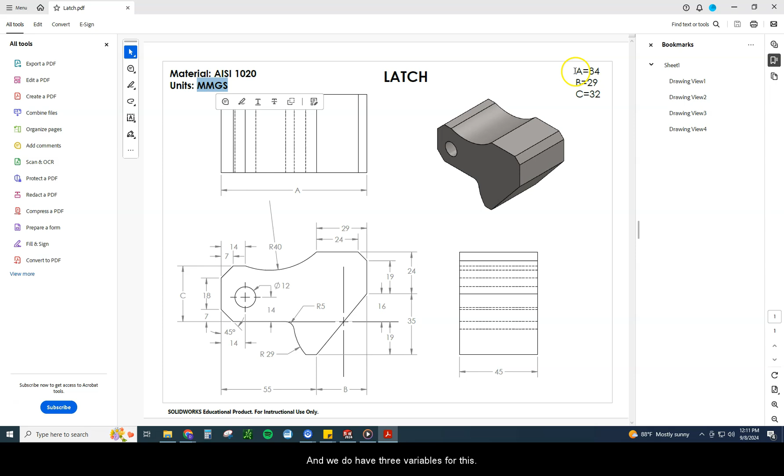We have A, which is 84. That's going to be our total length of our object. We have B, that's the distance from left to right of where this diagonal line is located. And then we have C, which is the height of this back part right here. Okay, so we're going to dive into this. Before we do, I kind of want to point a couple things out.

Number one, this distance right here, you're not going to see a length on this distance because it is based upon the center of this arc right here. This arc, if you draw it with this center point, it's actually one great big circle, and that's the center point for it. And you can see that center point is collinear with this horizontal line right here. So as it comes across, that's where it's going to cut through.

We can see our overall length, like I said, is 84, so you have to take that into mind whenever you're trying to locate this center point. You have a fillet right here of 5, and you do have another arc right here with a radius of 40. You have a couple of 45-degree angles on here, and one of the things that I try to teach during this section is bringing in some actual geometry.

Okay, so the Pythagorean theorem says that in any right triangle, a² + b² = c². C squared is the hypotenuse. So the squares of the two sides will always add up to the square of the hypotenuse. What that means in geometry when you're drawing is if I have these two that are the same, so like right here I have a height of 7 and I can also see a width of 7. Anytime I see that the height and width are the same, the hypotenuse can only be a 45-degree angle. Okay? It's what you call a right triangle. That's the only angle that it could be.

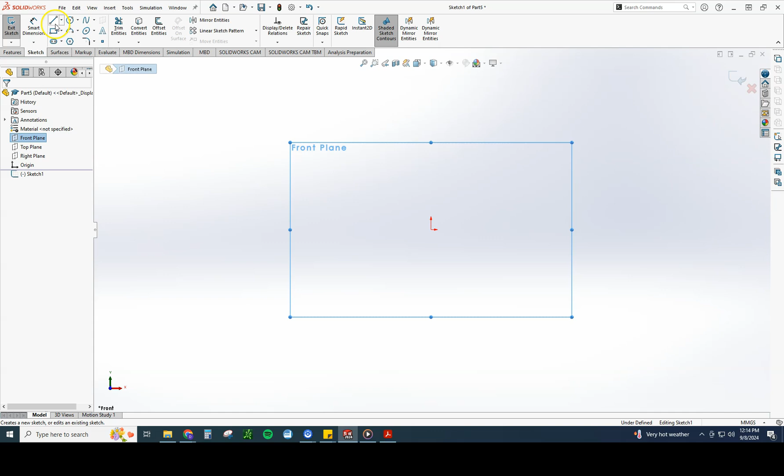File, New, Part. I'm going to go front plane sketch. And again, I'm going to start with the circle. I'm already on MMGS. Mine defaults to that. So I'm going to start with the circle, and I know that circle was a diameter of 12.

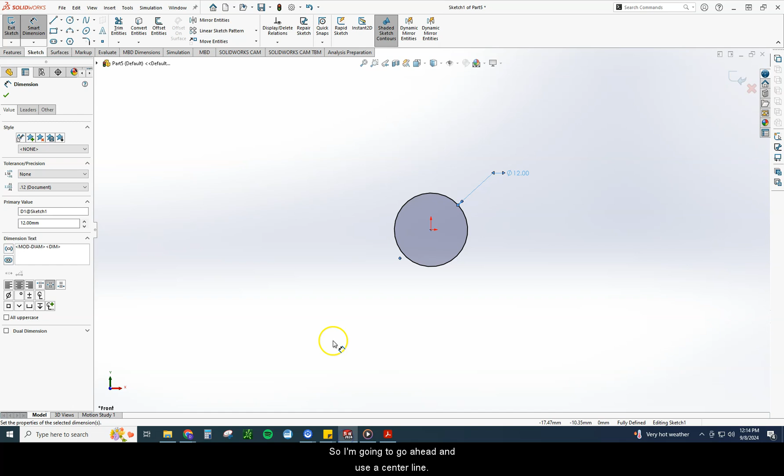Okay, so then I can see that this line right here, this horizontal line, is 14 millimeters away, and it's also 14 millimeters away that way. So I'm going to go ahead and use a center line. Just go down. Smart dimension that, and that should be 14 away. That was from the center.

Yep. So now I know I can start drawing this piece over here where I go left, up at an angle, up at an angle, and back over to the top of this. And I can see that the distance from the center of the circle here is 14, and this line here from this point to here is 14. So I know that this point ends directly above that circle. So let's go ahead and draw that.

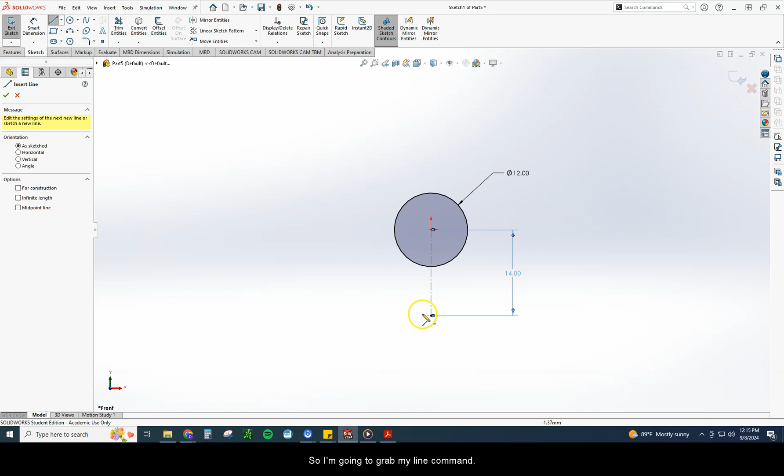So I'm going to grab my line command. Just going to draw a line over, up at an angle, up at an angle, and I'm going to match this one to that because I know they're going to be the same, and I'm going to end it directly above my circle.

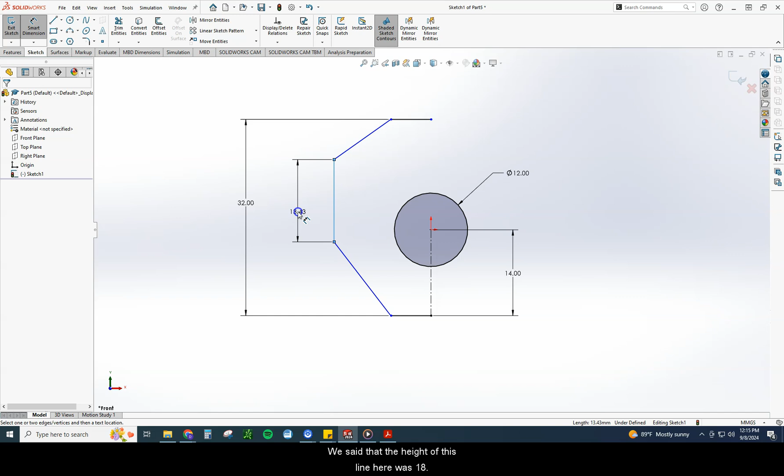Well, we already said the overall height was 32. We said that the height of this line here was 18. We said our width from here to here was 14. And we said the same thing here. From here to here was 14. So far, so good. We know we have 7 here in the 45-degree angle. So let's go ahead and set those. So I can do 7.

This should automatically now be 7, and it will make it a driven dimension if we try to place it on there, because we're already defining 32. So this would make it what we call driven or over-defined. We do not want that on there, so we're just going to hit cancel there. Let's go ahead and do the width here. That's going to be 7. Same thing down here, 7, or we could have put it on a 45-degree angle. Either one of those would have been perfectly acceptable right there.

So now what we need to do is go ahead and I'm just going to bring a center line over, because we want to go ahead and start on this side over here. So I'm going to draw all this over here, all this up here, and then connect them in the middle. Okay, because I know I have all my arcs in the middle here.

So if I took a line from this point here over, well, how far is that? Well, I can do some math and say, well, if A is 84, and I've already gone 14, that means if I draw a line over 70, I should be right here at this point. Well, if I'm right here at this point, now I know I can go up 16, go up 19, go up at an angle, come over, and I'll get my line. So that's what I'm going to do.

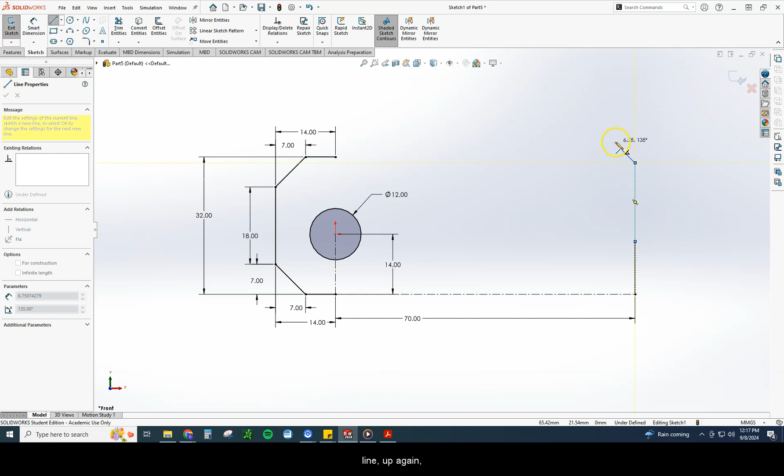So I'm going to start here. I'm going to say 70 here. And then I'm going to go from this point up with a regular line, up again, up at an angle, and then over. So I know I wanted this one at 16. I wanted this one at 19.

I wanted from here to here at 24. We said this width was 29, and this one was 24. So again, 29, 24, 24, 19, 16, that's where I got all those dimensions.

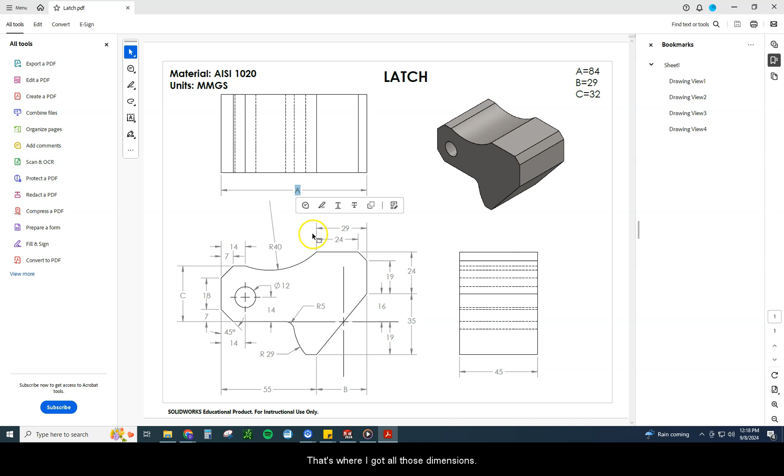So now what I can do is start doing this other part. So I want to figure out where this goes from here to here. Now I already have the starting point up here. Now I just need the end point for that diagonal. Well, if I already know where this is, and I can go down 19, then go over B, which is 29, I can get that end point. So let's go ahead and do that.

So I'm going to go, no, I should have used a center line right there. I really should have used a center line right here as well, and I can actually change that now. So you can just select on it, hit construction geometry, and it'll change that to a center line, because we know that line's not actually a line, it's just the space in between there. So let's go ahead and use the center line and go down and then over.

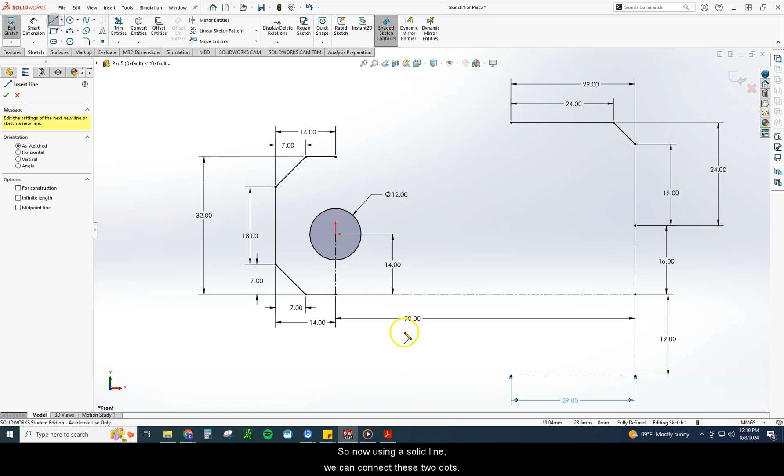Let's put those dimensions on. So we said this was 19. 19 plus 16 gives us that overall of 35, which we saw. We said this was B, which was 29. So now, using a solid line, we can connect these two dots.

Okay, so I have my diagonal. I'm going to bring this 70 out of here because I don't really need that anymore. Instead, what I'm going to do is put my overall dimension on here. That way that sticks in place. I like that dimension a little bit better. I know that's a known dimension. 70 really isn't anywhere on the drawing. And plus, I'm about to trim this little piece off.

So I need this center point right here, right? If I hover my mouse, because I'm getting ready to draw this circle here, I can't really get a center point, but if I just simply trim that piece, that gives me a center point. Now I can take a circle from that and smart dimension this, and we said it's a radius of 29, so 29 times 2 to give me diameter. Puts me right there.

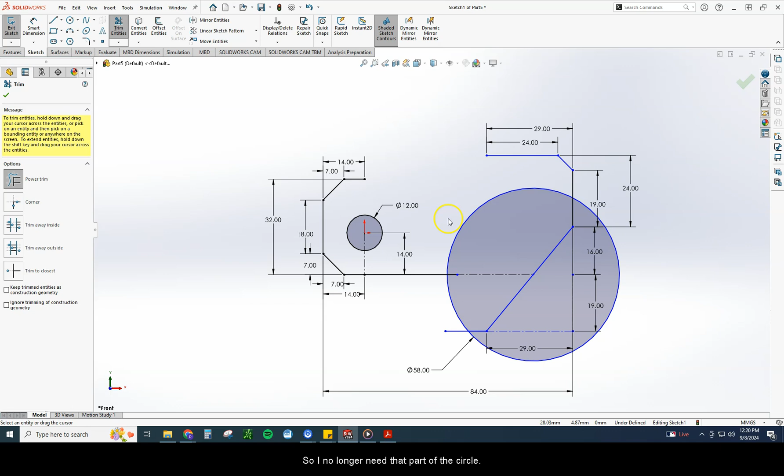Draw a horizontal line over. I'm going to draw this horizontal line over here and then trim out the things I don't need. So I no longer need that part of the circle. I don't need that part. I don't need that part, and I don't need that part. I can leave this on here if I really want to. That's up to you. I usually take it off of there. I'm going to leave that dimension on there for now.

The one thing I do want to do before I do anything else is make sure that that point stays right there, because you can see right now this is underdefined. So I know that this is perfectly in line with this horizontal line. So I'm going to do a quick control click. So I'm going to select on that point, control click it to this, and make it coincident. That keeps that from moving vertically.

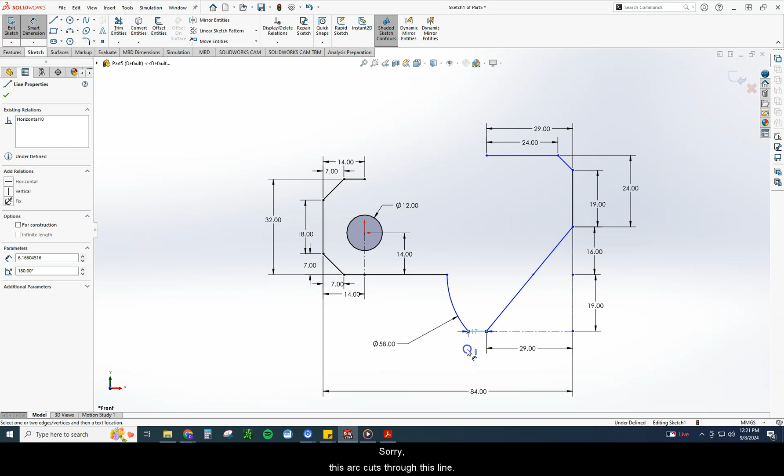Okay. I could, if I want to, go ahead and put on these other dimensions and snap it to it. Not really necessary. If you want to double check to make sure what you have is good, what I'll typically do on here is measure this line right here. It should be 6.17 if you did it right. That's just based on where this arc cuts through this line. 6.17, there we go. So I know I did that right.

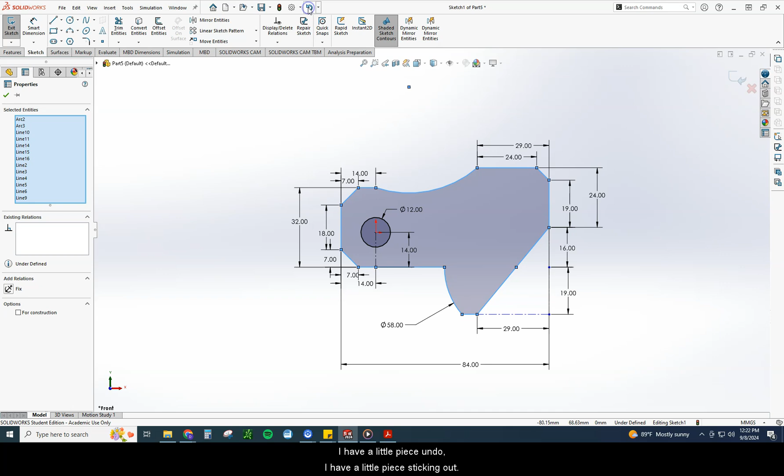The only other thing I got to do is define a couple more lines here. So I'm going to go ahead and put on my arc here. And then I also need a fillet. This had a fillet of 5. I have a little piece. Whoa, whoa, whoa. Undo. I have a little piece sticking out.

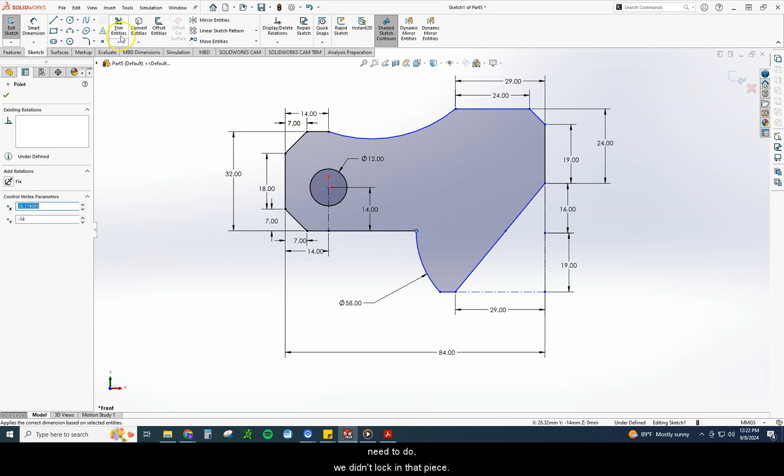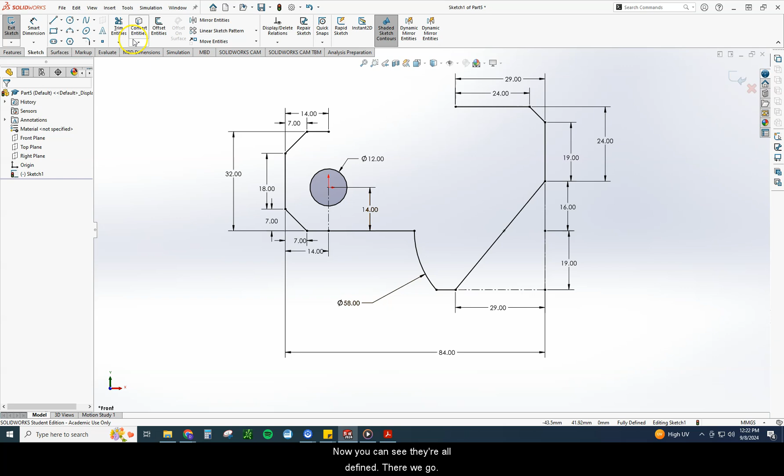Uh-oh, that's moving on me. So when that's moving on you, that's not good. Okay, so one of the things that we need to do is we didn't lock in that piece. That's what it is. So let's back up here. Back up, back up. That's okay that that went away. It's this one right here that's moving on me. So I need to take that one and also make that one coincident. That locks that into place. Now you can see they're all defined. There we go. That's what I was missing.

Let's put that back on there. We'll put our dimension on there. That was 40. Put our fillet on there. It was 5. And there's our object. Okay, so don't forget, sorry, and I missed that whenever I was doing that.

I haven't done this part in about a year. I've done it 1,000 times, and even I forget stuff sometimes. So just looking at why it's underdefined and then figuring out, okay, what point would make this more defined, and that's what I was missing, is I didn't make that coincident with that horizontal line.

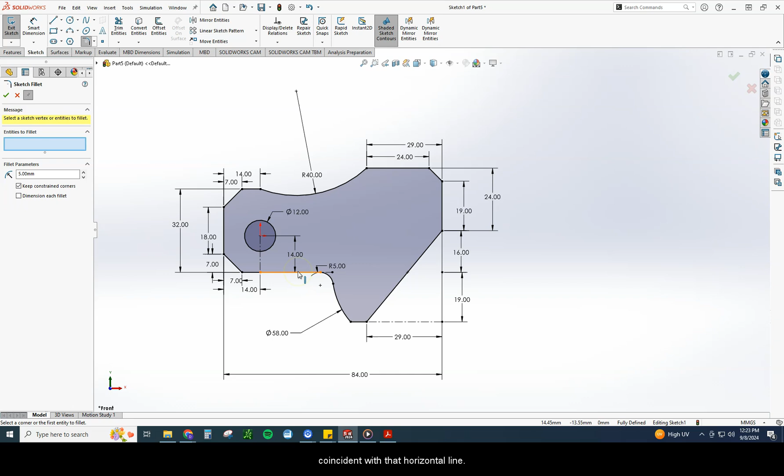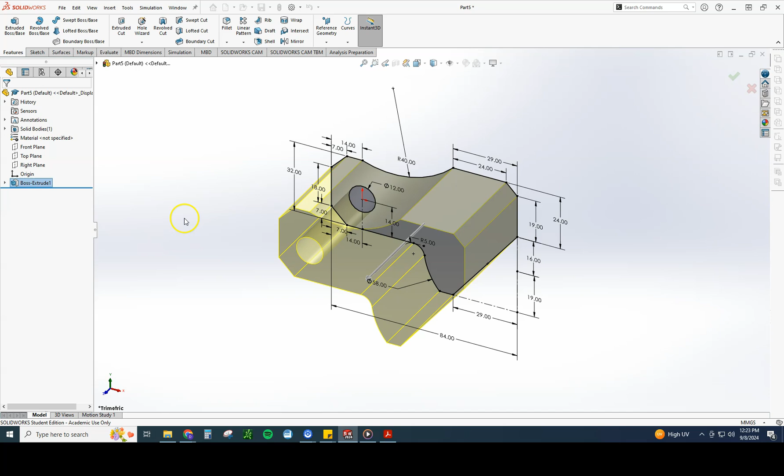All right, so now that I have that, I'm going to just simply do features, extrude boss. And for this one, because it is just one object, you can either go blind or mid-plane, doesn't really matter, as long as you have the width here, which our width is 45. Here we go. And then make sure you put on your material, edit. This is going to be in steel. We're doing the AISI 1020, just standard AISI 1020. Close. And there's our product.